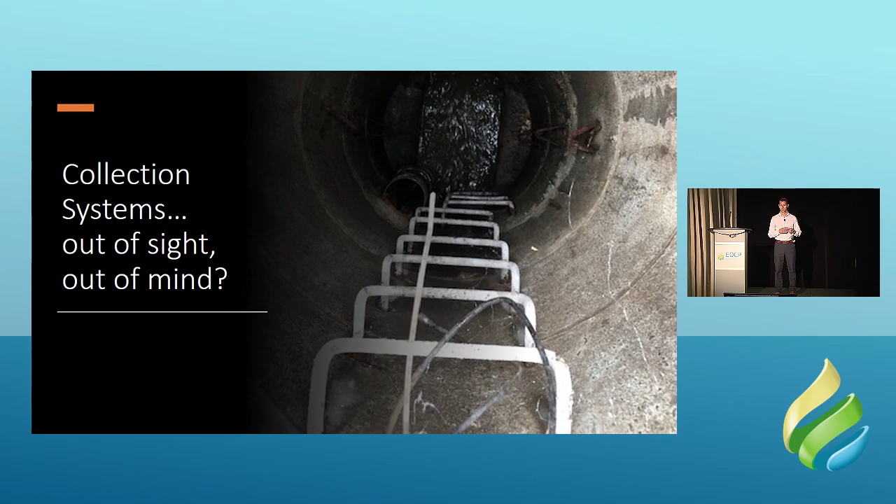And in the future, our collection systems will take on an even greater role protecting the sustainability of our water resources and managing extreme weather events. Because of that, it's critical we take a look at our collection systems and see where innovations in technology can assist us to make proactive decisions rather than reactionary ones to better protect the public health and the environment. And as our collection systems continue to age and changes to our climate continue to occur, an even greater need to understand the real-time conditions under which our collection systems operate is emerging.

This will assist proactive utilities across the province in 4 key ways. First, being able to maximize the operational availability of our existing constructed infrastructure. Second, being able to adapt to rapidly and dynamically changing water levels in our collection systems, as well as varying levels of total suspended solids. Third, being able to maximize effectiveness and reduce overall cost of operations. And last, to better protect the environment.

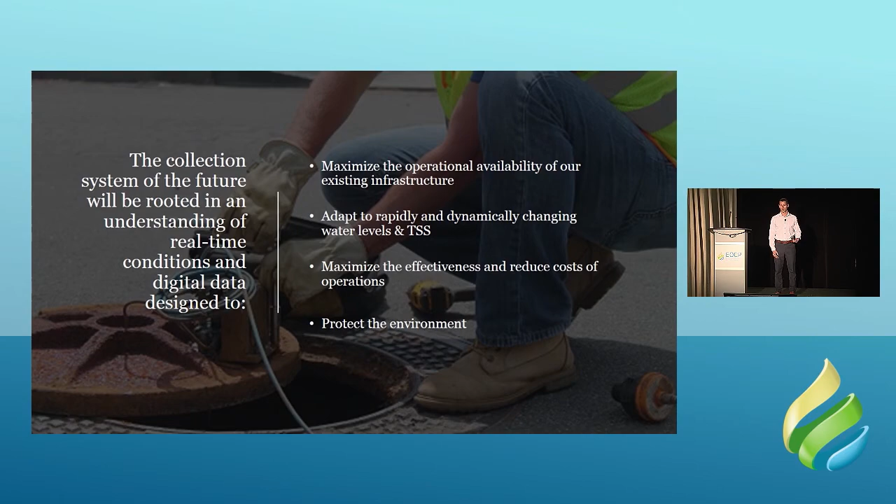Now, my previous slide mentioned being able to maximize operational availability. So what is operational availability? Well, it can be defined as the ability for a system to operate as designed when required. And for a collection system, this means being able to transport wastewater or stormwater, depending on the collection system we're talking about, and be able to do so under a wide spectrum of operating conditions. Those include things like significant and rapid changes in flow conditions due to inflow from storm events, or infiltration due to high groundwater levels or soil saturation.

Also external impacts like the buildup of fats, roots, oils, and grease, what we like to call FROGs in the system, as well as being able to manage H2S that can generate odor complaints from your constituents and businesses, and which can ultimately lead to the corrosion of concrete pipes. So to squeeze every last drop of capacity out of our existing collection system assets, it's important that we understand the dynamic conditions under which they operate.

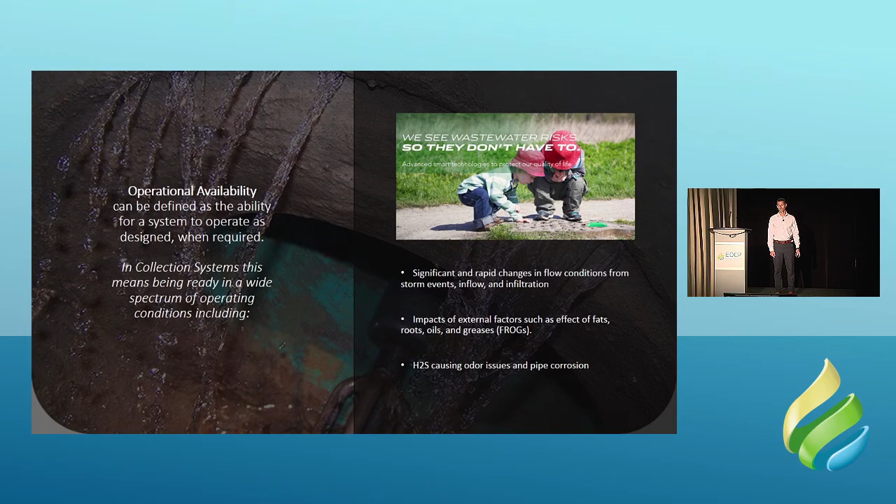Due to the harsh environment of a sewer, real-time data collection, transmission, and monitoring used to be a very challenging thing to do and required a confined space entry to both install and maintain the sensors. However, innovations in robust, non-contact sensors and long-life batteries have really made real-time diagnostics in our collection systems easy to do. Sensors can now be installed without having to ever physically enter a manhole, with many providing options that give you visibility from the bottom of the invert right to the top of the manhole lid, much like you can see on the screen right now. These simple-to-install sensors, once installed, allow for a very proactive approach that helps improve operational efficiency.

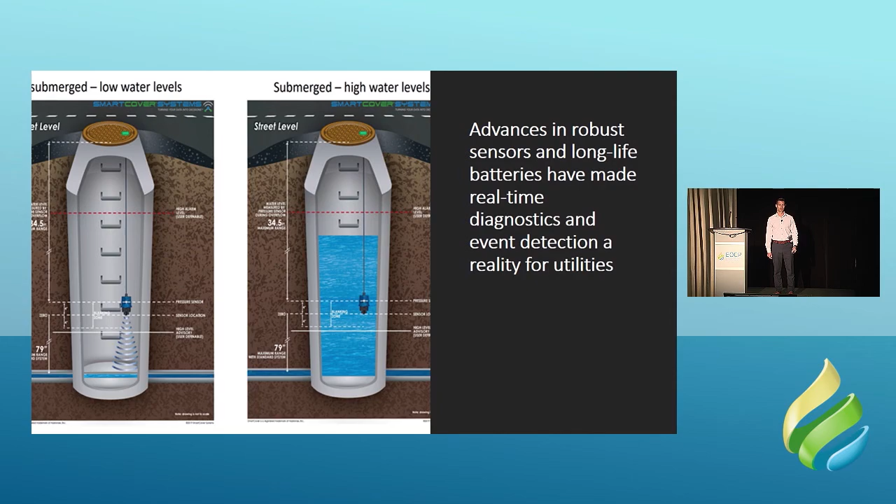Today for this presentation, I'm going to hone in on 3 key areas where remote monitoring technology can assist your operations. The first one being reduction of high-frequency cleaning and prevention of sanitary sewer overflows. The second one is managing H2S gas, or at least the levels of it. And the last one, inflow and infiltration. 3 common problems experienced by many municipalities across the province.

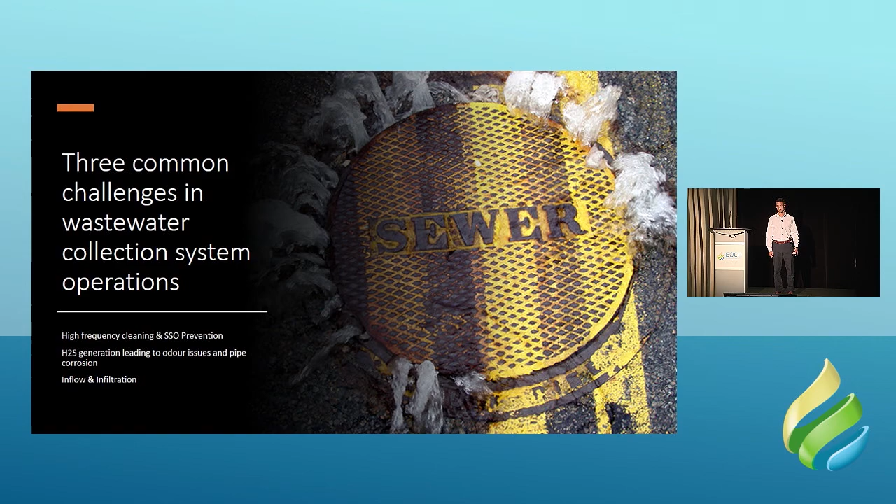So this year, COVID-19 has really shown us we need to be able to expect the unexpected. It's had a real profound impact on public works departments across the province, across the country, and really across the world. And we really should commend our operators and management of every public works department for being able to adapt on the fly to the challenges you faced in keeping that essential water and wastewater system running smoothly this year.

Now, on the wastewater side, many departments have had to scale back their sanitary cleaning and flushing programs. For some, this was due to concerns of potential exposure to COVID-19 in wastewater, while for others it was a more simple reason, a lack of staff due to some staff having to work remotely on revolving schedules.

Unfortunately, though, the increased use this year of personal hygiene products, things like wipes and masks and gloves, has led to a lot of these products being improperly disposed of, causing an uptick in blocked sewer pipes across the province. And we've seen blockages like this from numerous municipalities that we partner with, but they do benefit where remote monitoring is in place to give you an advanced warning of potential backups.

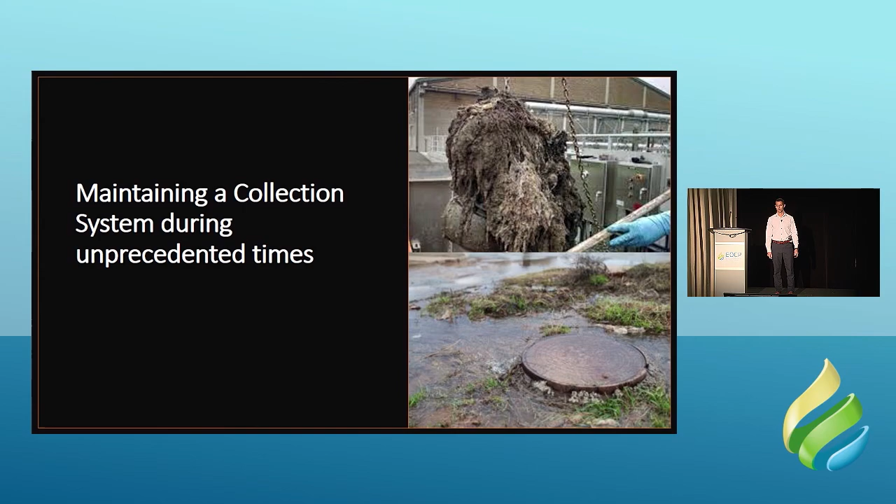Now, cleaning is a necessary function to maintain your sanitary system. Typically, though, this is done on a calendar-based approach, whereby the same sewer lines are cleaned in the same frequency in perpetuity. Cleaning programs are not only very labor-intensive, but require expensive machinery to purchase, that driving around town all day contributes to the carbon footprints of our cities, and when cleaning is used excessively, also accelerates wear on pipes. With the advent, though, of smart sensors, there is another way to tackle this maintenance program.

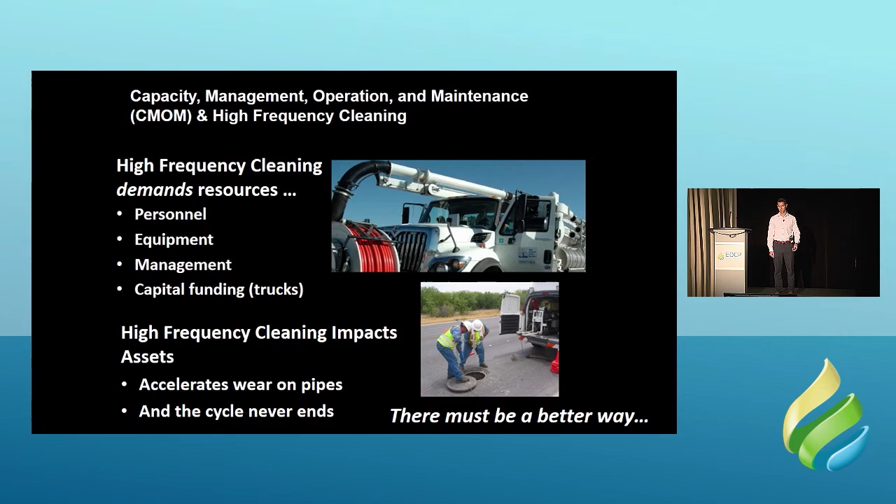So being able to know which pipe segments need cleaning and when they need cleaning can result in substantial savings to your operation. Rather than cleaning Main Street simply because it's September and it's been 3 months since the last time you cleaned this pipe segment, utilities can monitor the levels in their system remotely and locate pipe segments that are beginning to show buildups, or conversely, low flow conditions that might be contributing to the accumulation of solids, allowing for strategic targeting of your cleaning operations.

Tackling this maintenance program with real-time data can not only reduce costs, but also keep your crews safer by potentially reducing the amount of high-frequency cleaning needing to be done, and therefore reducing their exposure to the actual wastewater. And utilities who have embraced this type of technology for pipe segments that are subject to high-frequency cleaning intervals have been able to reduce their cleaning frequency by as high as an astounding 95%, while virtually eliminating overflows for all of these monitored pipe segments.

Now, while not as widely adopted here in BC yet as in other parts of Canada and indeed across the continent, this is beginning to change, with numerous municipalities starting to take a data-driven approach to their cleaning programs. There's numerous municipalities across BC who are already putting this type of technology to work for them.

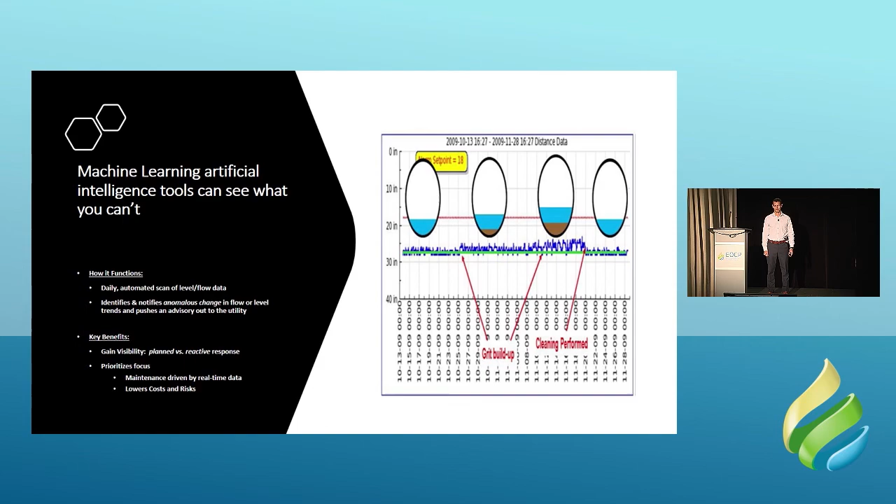Utilities, once you have your remote monitoring in place, do have the data they need to make these types of informed decisions. And all vendors will offer some sort of a cloud-based secure web portal so you can access the data. Some will offer you a mobile app as well so that you have this insight right in the palm of your hand. And most will also offer some sort of an API if you want to be able to push this data into a SCADA system or whatever it is you want to push the data to.

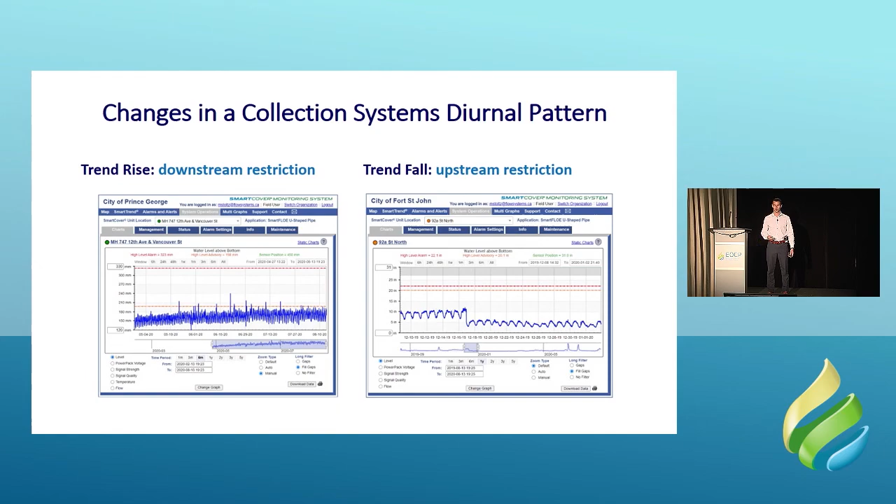And what they decided they would do is do a pilot where they put 10 sensors in locations that had to be cleaned monthly and would only clean when the data told them it was time to clean. So quick and easy math, 10 sensors, 12 times a year, that's 120 cleanings they used to do on these 10 pipe segments alone. And what they found quite interestingly after this pilot in 2016 was they only actually had to do 7 individual cleanings, or a 94% reduction in high-frequency cleaning at these pipe segments.

Now, a city that size, of course, has much more than 10 pipe segments that are subject to high-frequency cleaning. So they decided in between 2017 and 18 to deploy sensors to basically 200 of their worst sites. And these were sites that were being cleaned monthly, bi-monthly, and a couple of quarterly ones that kept them up at night, and left the sensors in, let them tell the city when it was time to clean. And some interesting data came back. So normally, these 200 pipe segments would require about 1,200 cleanings on average every year.

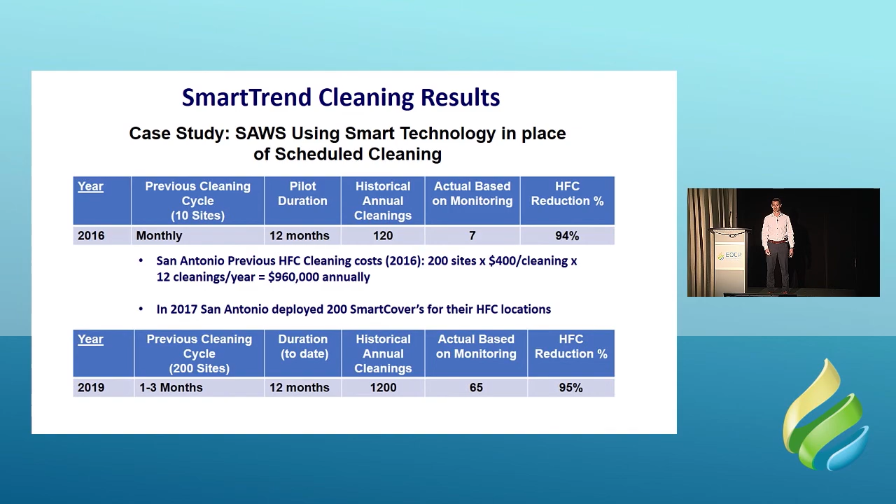Now, cleaning is, of course, primarily done to reduce buildups, which could lead to sanitary sewer overflows. However, there could be other locations in the collection system that really keep you up at night. You know, those areas that are prone to backups, like siphons, problematic areas, or maybe areas that would be environmentally or financially, or maybe even politically, a nightmare should a backup occur. So think of those locations as the low-hanging fruit or the obvious first locations you'd want to consider remote monitoring technology. Because this remote monitoring gives you around-the-clock warning of potential problems to prevent spills.

So some common areas to monitor would include sewer pipes that run through easements or other environmentally sensitive areas. Maybe you've got areas in your system where you've got a planned future capital improvement project to reline or replace pipe, but that could be years out in a multi-million-dollar project. In the meantime, a remote monitoring sensor could be a very inexpensive way to babysit these pipes.

Another one could be an obvious one. If you've had a past spill, putting a remote sensor in there to alert you and prevent future spills is going to be a fraction of the cost of that spill. Never mind the PR nightmare of dealing with the residents of a second spill in the same location.

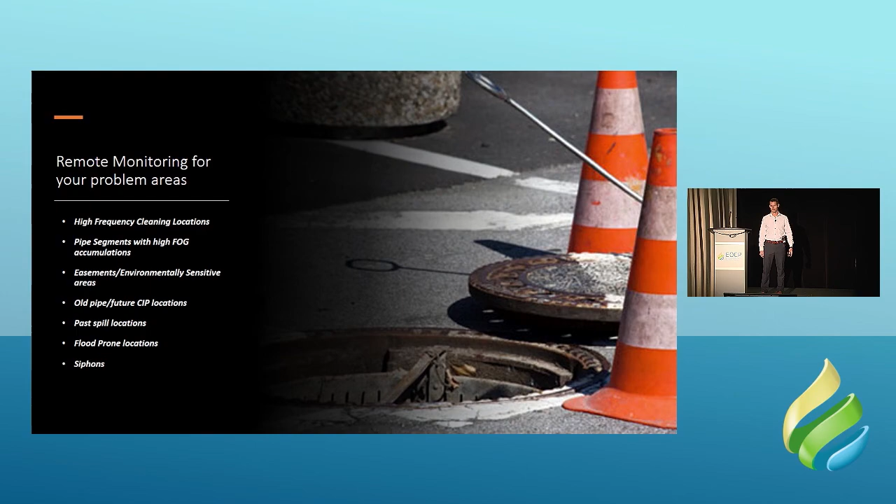Okay, and we're going to switch gears now. So that kind of covers off high-frequency cleaning and SSO prevention. The next topic we're going to touch on is H2S. So one of the consequences with new low-flow plumbing devices in our houses for water conservation, which has been widely successful in reducing potable water usage in the house, has been an overall reduction in wastewater hydraulic flows during dry weather periods. In our wastewater system, reducing the amount of water but transporting the same amount of solids leads to, of course, an increase in total suspended solids. This increase in solids also increases the potential for them to decompose down the lines, particularly in flat slope sections, and potential generation of hydrogen sulfide, or H2S gas. And this is the second operational challenge we're going to discuss how remote monitoring can assist.

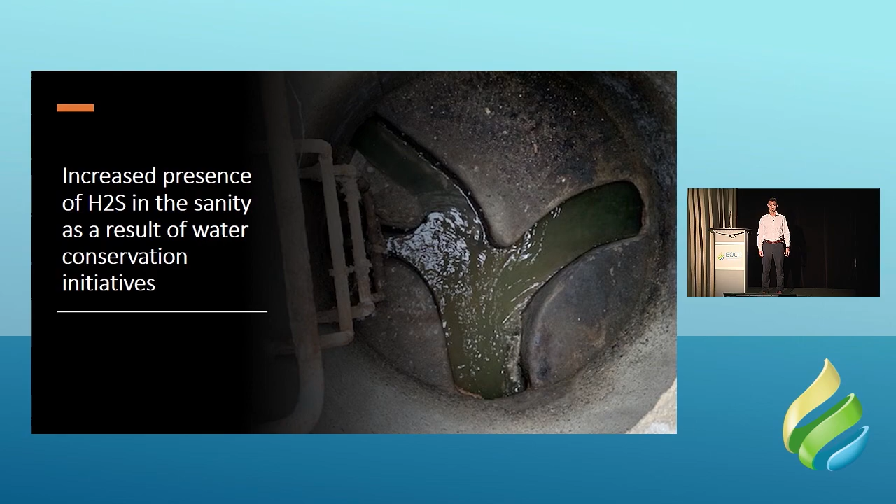Managing H2S for municipalities out there that are having problems with this is often addressed by a combination of flushing, pH control, and chemical dosing. Previously, H2S levels had to be obtained on-site, so a more reactionary approach was taken. However, much like the monitoring of storm and sewer water levels, advances in remote sensors for H2S gas also allow for the remote monitoring of this as well. Some sensor providers can also integrate precipitation data and even information from right in the manhole, giving you temperature information, which can be helpful to see how these are affecting H2S levels. More on temperature and precipitation data is coming up in a couple slides, so I'll skip right over that.

Having this information remotely on H2S levels can assist your flushing and chemical dosing programs, make them run more efficiently and economically, with the ultimate goal, of course, of reducing customer odor complaints and mitigating corrosion of our concrete sewer pipes.

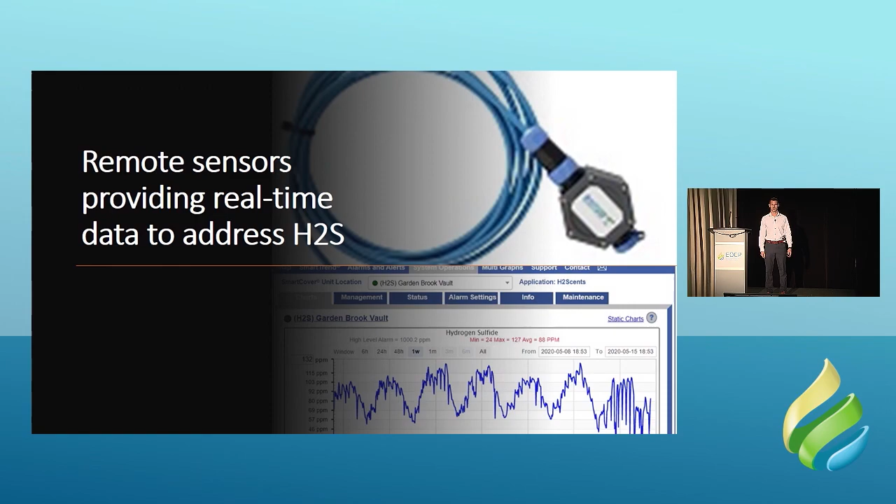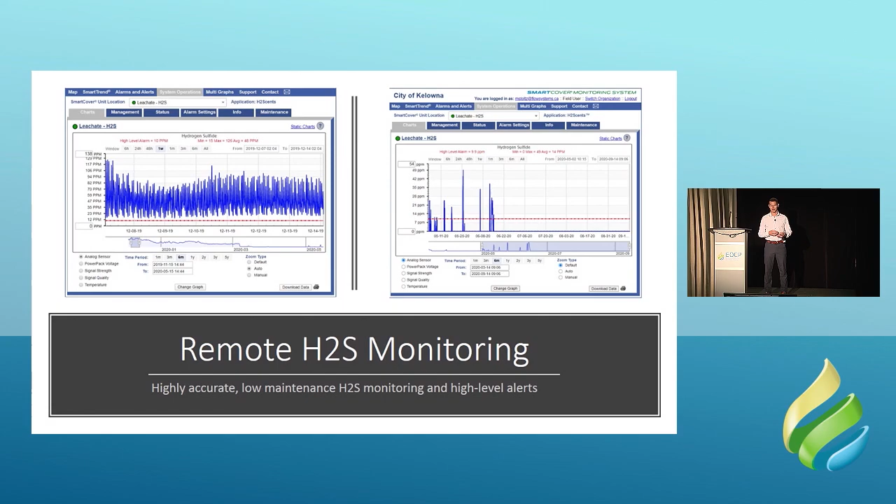And you can see that the amount of spikes in H2S that they're getting at this location now are very sporadic, and in fact, over the last couple months, are pretty much non-existent. So that would suggest to me that they're really starting to get a handle on this dosing program, and certainly the assistance of remote data is a component to that.

Here's another location, also in the city of Kelowna. This location will get H2S levels in that 5 to 10 parts per million range. And if you're not familiar with what that means, that's that range where your nose can smell that wonderful rotten egg smell of H2S, and where you're going to get odor complaints from your residences, businesses, and what have you. But having a remote window into H2S levels and an automatic notification when user-defined high levels are hit can be a real benefit in addressing this.

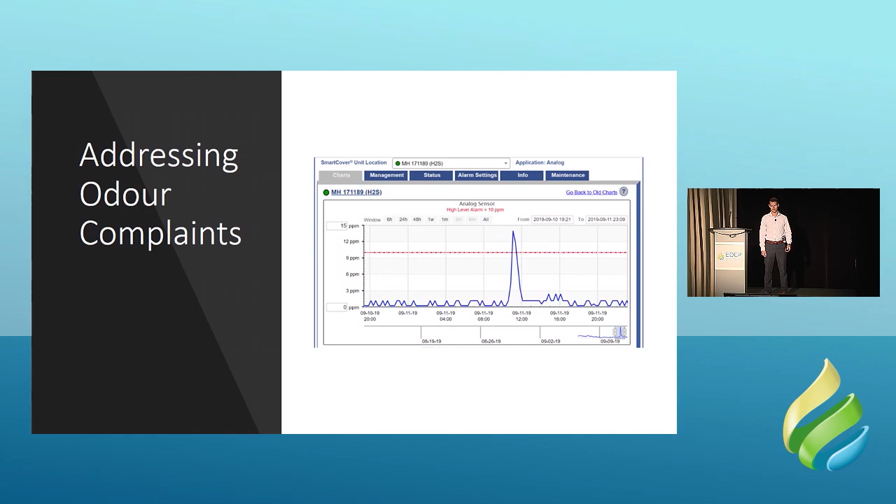And you may have actually seen this summer in the Watermark magazine where Mike shared a piece where he highlights their use of just this, remote monitoring technology to assist them in their H2S levels and their chemical dosing program.

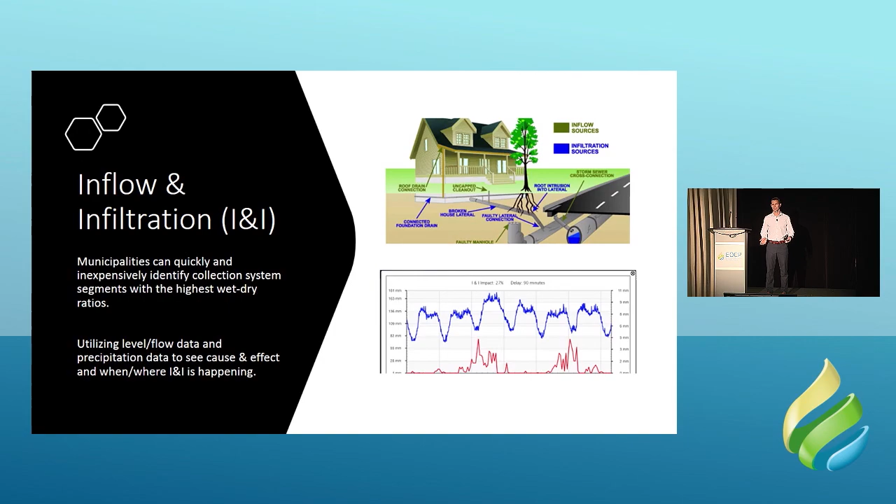The last operational challenge we're going to discuss is how remote monitoring technology can assist with I&I detection. So every municipality has some level of inflow and infiltration happening in their collection system. For some municipalities, this added volume of rain can present some major issues. Using remote monitoring technology, coupled with precipitation data, municipalities are able to get a cause and effect on when and where I&I is happening in their system.

So how do we capture the rain amounts? There's a couple options out there for obtaining this data for precipitation and temperature information and sending it back via the cloud to the exact same platform where the storm and sewer water levels reside. Some companies will utilize traditional tipping buckets that work on kind of a fill and spill concept, while others will utilize highly accurate virtual rain locations. And what they use is very accurate radar-based data to send the precipitation data back.

And one nice advantage to these virtual options over typical tipping buckets is no maintenance. They're not a physical site, they're a virtual site, so you can install them, if you will, with simple GPS coordinates and move them around as frequently as you like, with simple GPS coordinates.

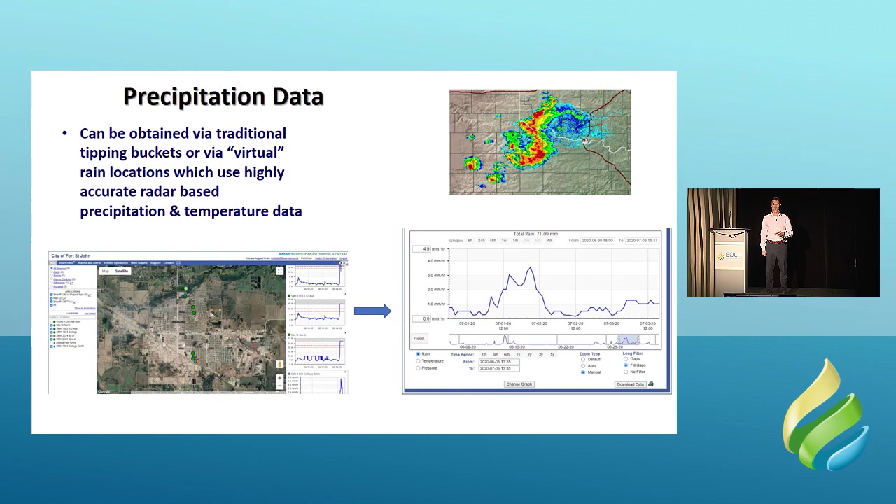So having that real-time information on our water levels and our precipitation are the first key pieces in identifying locations with high I&I issues. So that's great. We've got now all this data. We've got it all in one spot.

But no one wants to have to crunch those numbers and look at Tuesdays at 3 o'clock: this is our normal levels to be expected in October. Compare that to another Tuesday at 3 o'clock when a rain event happened, and what did that do to levels, and how much rain is that? So in the past, most would outsource that, get a study done, and get it sent back to them.

Advances, though, in machine learning and reporting tools with some vendors now enable this to automatically be done, comparing dry weather periods to wet weather periods, and telling you exactly which locations are showing the highest I&I impact. So essentially what this artificial intelligence tool is doing is looking at the normal levels to be expected on certain days and certain times in dry weather periods, and comparing that to the same days and times during rain events and looking at the difference, with that difference being our I&I impact percentage.

On the screen, you should see an example of an I&I report just like that from the city of Fort St. John, the northeast of the province. It's an interesting area because the summers can be very dry, but they can get some rain events that come through infrequently, but when they do, are extremely heavy and can wreak havoc on their sanitary and stormwater systems. So what they're using this for is to get a handle on which locations in the collection system are showing the highest I&I impact.

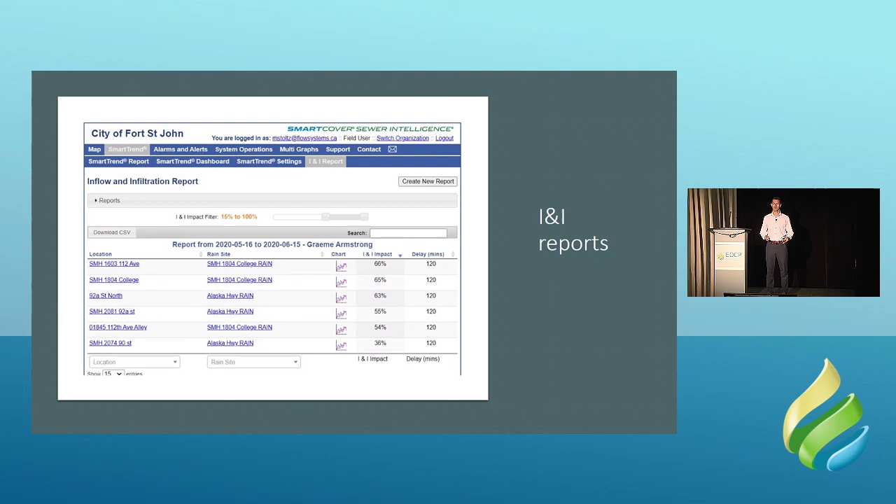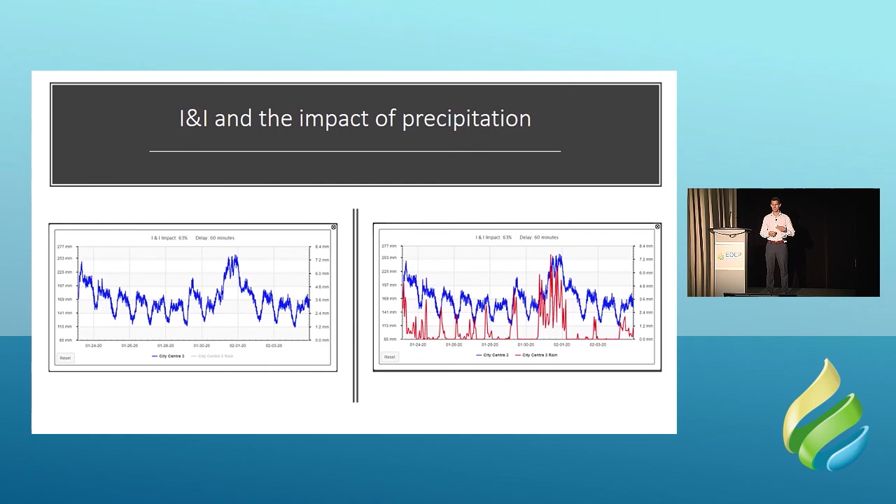And then from there, what you can do is drill down. This is from a totally different site. But you can see some pretty significant spikes in water levels. If you ignore the graph on the right, just look at the one on the left. And now, without remote monitoring, first off, these types of level increases may be happening in your system, and you have no idea they're even happening. But when we overlay the rain data, so that's the red you see on the graph right now, it becomes very apparent this is rain-driven. All the level spikes on this chart happen at the same time during rain events.

Above here, you can see two sites, also from BC, with really dramatically different I&I correlations. The site on the left experienced a pretty significant rain event, denoted in red, and the corresponding levels at that location barely increased. I'm not sure if you can see at home, but the I&I impact detected there was a mere 3%. So essentially a non-existent I&I impact for this location.

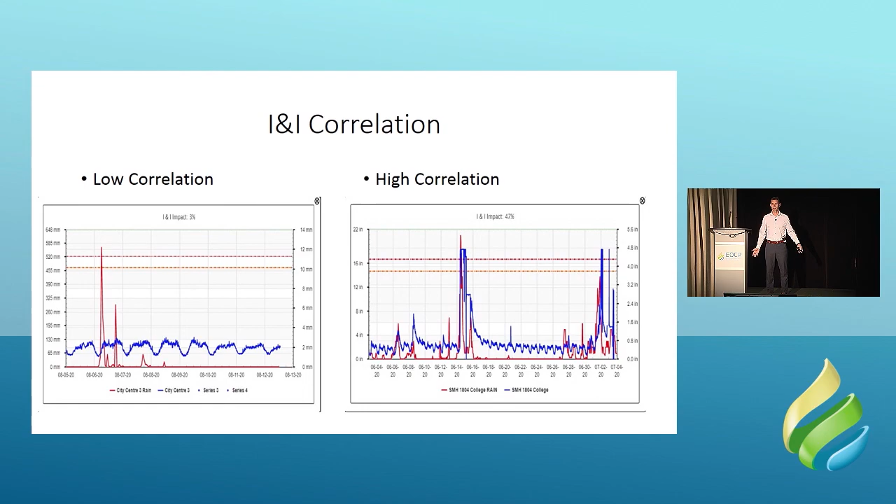We compare that, though, to the site on the right, which had a couple of rain events of similar proportion that resulted in some dramatic spikes in levels, high enough to actually trigger high-level alarms for this customer. These particular rises were still well below grade. These are deep manholes, but a significant problem when your collection system levels are coming up out of the invert, over the bench, into your manholes. And without remote monitoring, these types of events could actually be happening in your system without you even being aware, until maybe, unfortunately, it's too late, and you get such a big surcharge that you now have an SSO event on your hands and a big cleanup.

So typically, when you're starting an I&I program, you want to begin close to your treatment plant and work your way upstream, further up the collection system from there. For those collection systems where your wastewater goes to a regional system for treatment, then beginning close to that handoff point is where you're typically going to start and work your way upstream from there.

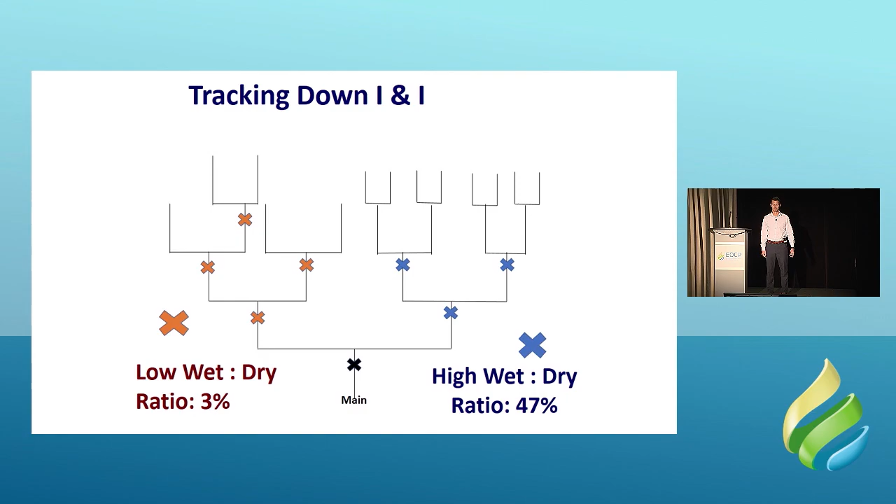And then the next step is to just simply reposition those sensors where more I&I was detected further up into the collection system. So you're kind of leapfrogging, if you will, like it shows in the chart. Those sensors have now moved further up the collection system, trying to track down where those highest I&I impact locations are in your city.

You can see here quickly why having a technology that's non-contact and, more importantly, non-confined space entry to install and service becomes really advantageous here, because you can quickly redeploy these sensors in new locations with ease. Once you get into a more focused section of your municipality, maybe coupled with smoke testing or CCTV camera inspection or whatever preferred method you like to use, now you're doing this in a much more focused section of your city rather than broadly across the entire system.

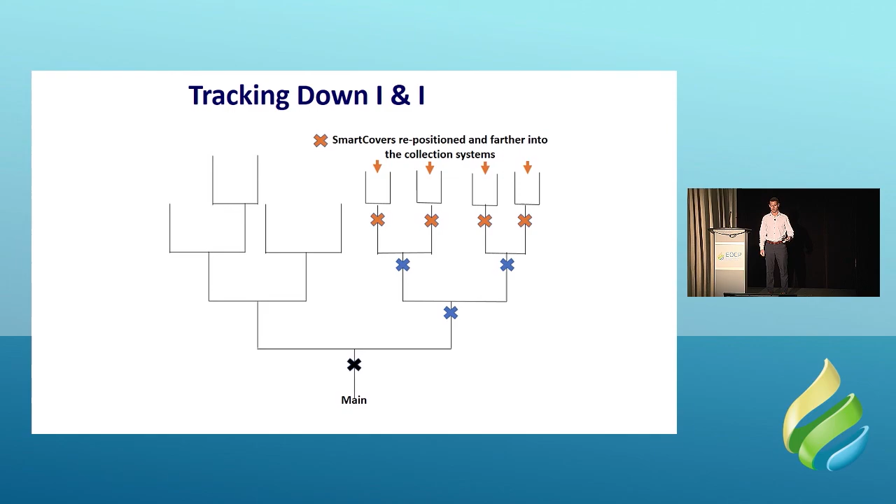One last one here on I&I I wanted to show you, and this is a pretty significant one. So on the graph here, you can see two pretty significant spikes in level during rain events in Lake Country, British Columbia. With this data, they were actually able to track down a very large, illegally tied in, or maybe incorrectly is a better word, I'm not sure if it was legal, storm connection from a commercial operation. And that was causing these significant inflow events. This connection has since been rectified, and these inflow events are no longer occurring.

So if you take a look at the graph here, you'll notice, again, red is our rain data, blue is the water levels at this location. And this sensor had only been installed a few days. We got the sensor installed, I think, on a Wednesday, and that first rain event was on a Friday. And you can see, when that first rain event came, a significant spike in levels. A few more days of dry weather, back to that standard diurnal pattern you'd expect. Another rain event caused, again, the same idea, a significant rise in levels at this location.

So armed with this, they did some investigative work, and I don't know the backstory on how they figured out or found this commercial storm connection tied in, but they rectified it, and then about a week later, we had another rain event, which was very comparable to the second rain event in volume of rain. You can see that on the graph, but absolutely no increase in levels. So like we talked about in the previous slide, the district could now look at repositioning these sensors further up into the collection system to continue tracking down significant sources of I&I like this.

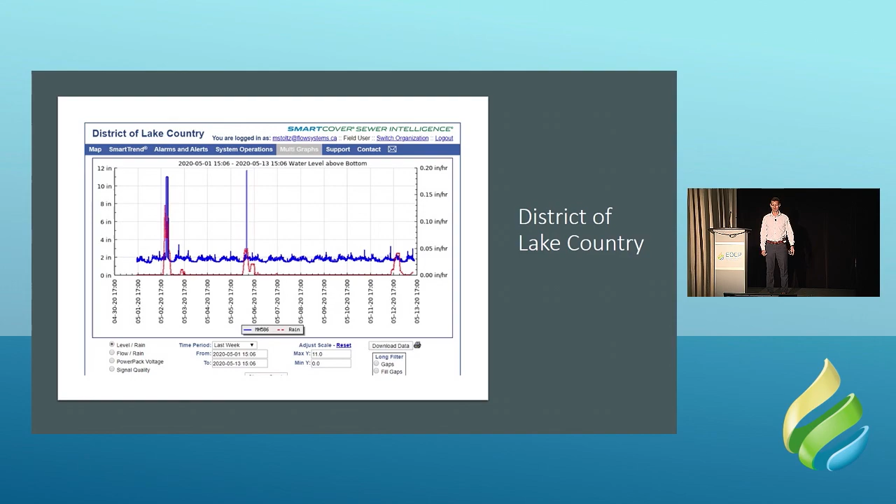There we go. So throughout this presentation, we've focused on just a few applications where smart monitoring technology can assist your operations. However, we work with municipalities across the province using the same types of technology for really a plethora of different applications. Some will use smart monitoring technology to monitor surface water, like rivers and streams, leachate ponds, reservoirs, things like that. Combined sewers, so if you want to get a sense of how much volume occurred during an overflow, and also what amount of rain triggered your overflows.

Maybe temporary applications, so if you're doing work on a lift station, you may want to install a remote monitoring sensor to give you a remote window into what's happening there in case you have issues with your generator or that bypass pump. And I could also point you back to the city of Kelowna for a perfect example of this, where they put a remote monitoring sensor on a bypass pump. The generator failed and would have caused a sewage overflow in an industrial park had they not had this remote monitoring technology.

And then for lift stations, because remote monitoring technology does not require any power, it's an off-the-grid redundant backup. So maybe on things like a critical lift station, this gives you that peace of mind to know what's happening at the lift station, that if power was knocked out or anything happened, you have this independent, redundant, off-the-grid backup to let you know what's happening.

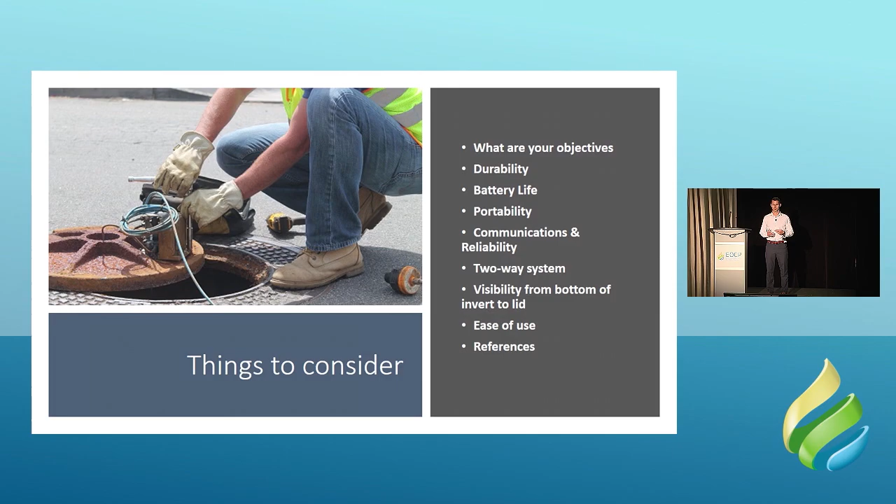So for those attending from other municipalities that would be interested in having cloud-based access to one of our vendors' portals, what they've agreed to do, and we have some cities that are graciously willing to share their data in a sandbox environment, if you will. So don't worry, you can't break anything. You're not going to set off any alarms. But it would give you kind of a window into how they're using the technology, how these cloud-based portals work.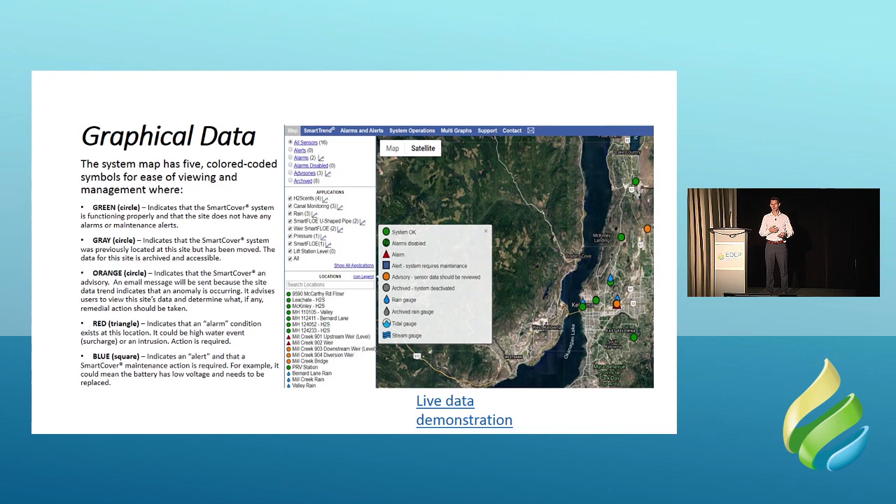If you're interested in that, I'd be happy to set you up with a temporary access so you can see that. You can navigate it on your own, or if you want, I can kind of work your way through it and kind of explain what they're doing with the technology and how it's assisting them. And then you can certainly ask me any questions on how it may apply to applications you have.